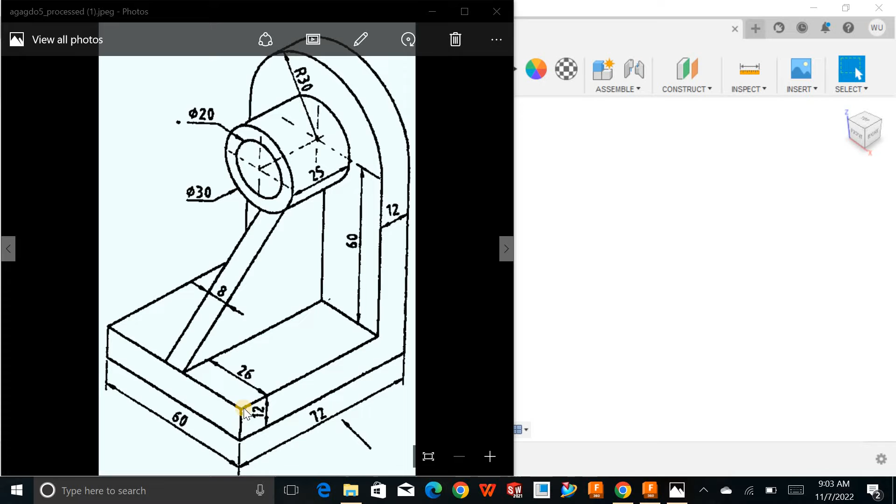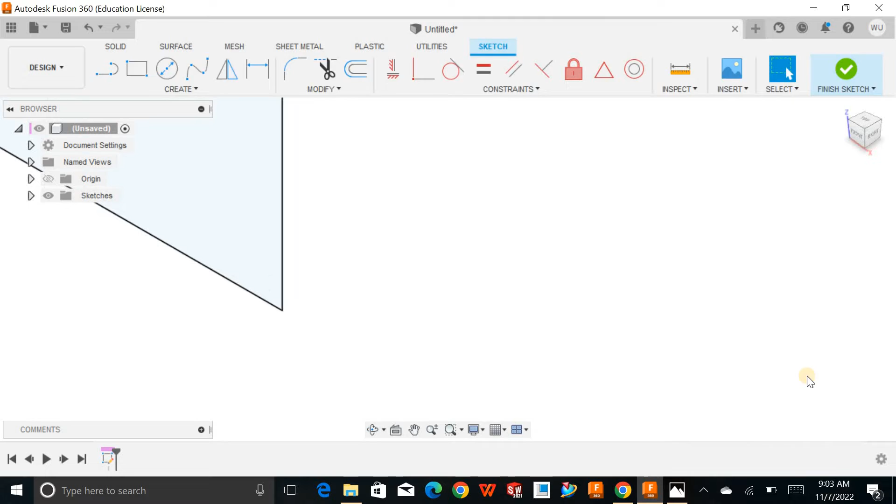So let's start it. First we will make the base. This dimension is 60, this is 72, and the height is 12. Sketch, choose a plane, draw a rectangle. This is 72, press tab, and this is 60. Press enter. Finish the sketch, and this one is 12. Okay, home this.

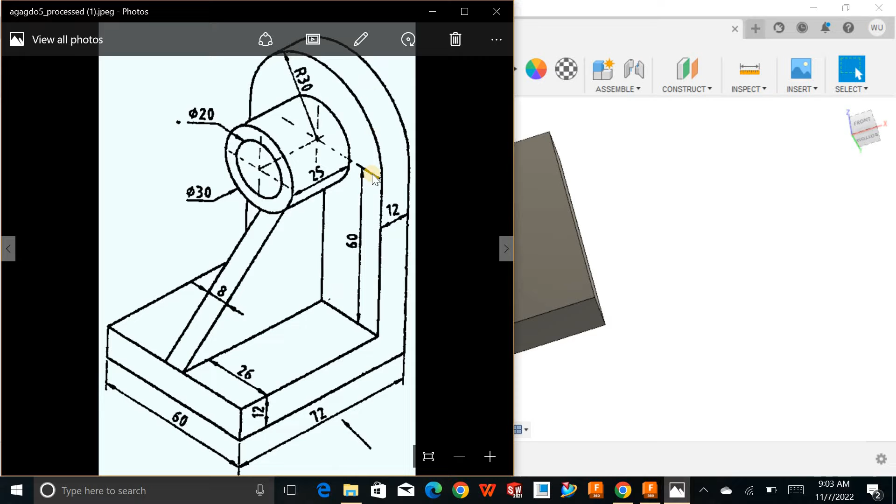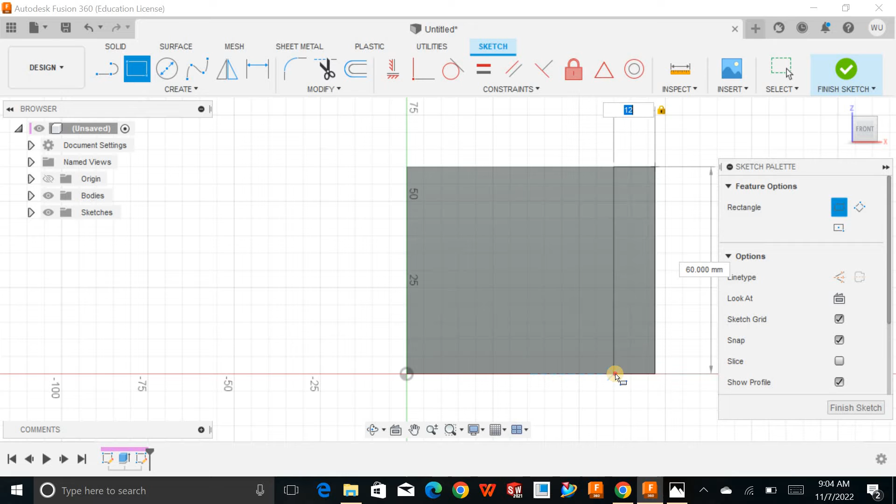Next we will add this vertical flange. For that we have the dimension 60, the thickness is 12, and we will add this radius to extrude it up to top. So height will become 90. Choose this face, sketch on it, draw a corner rectangle. This is 12, and say OK. Finish, extrusion, select this region and say 90.

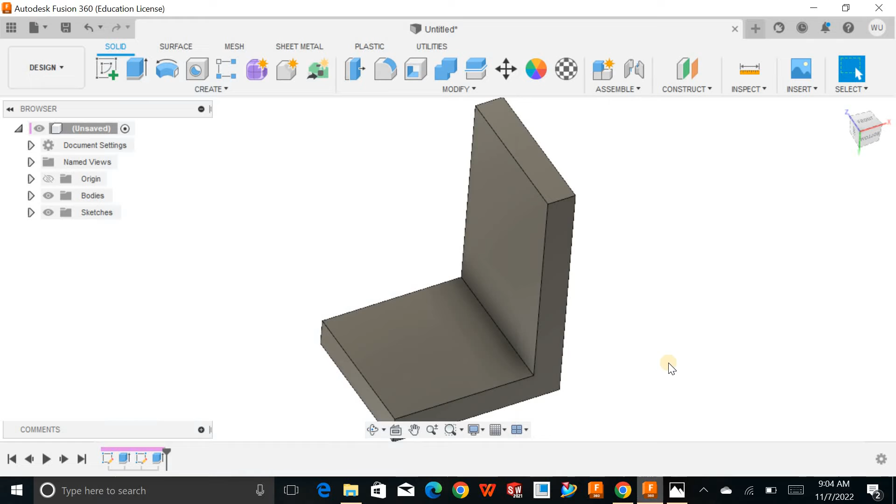Now I will add the rounds of radius 30. Click on fillet, this edge and this edge. Define the radius 30 and press OK.

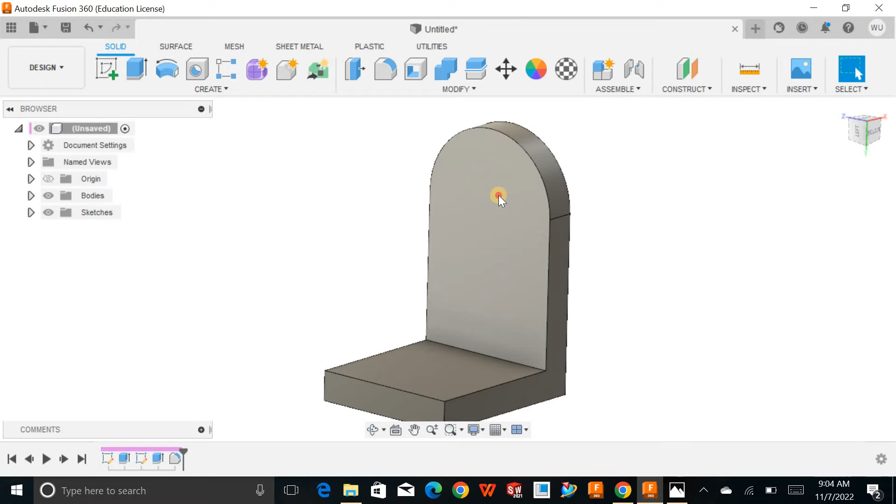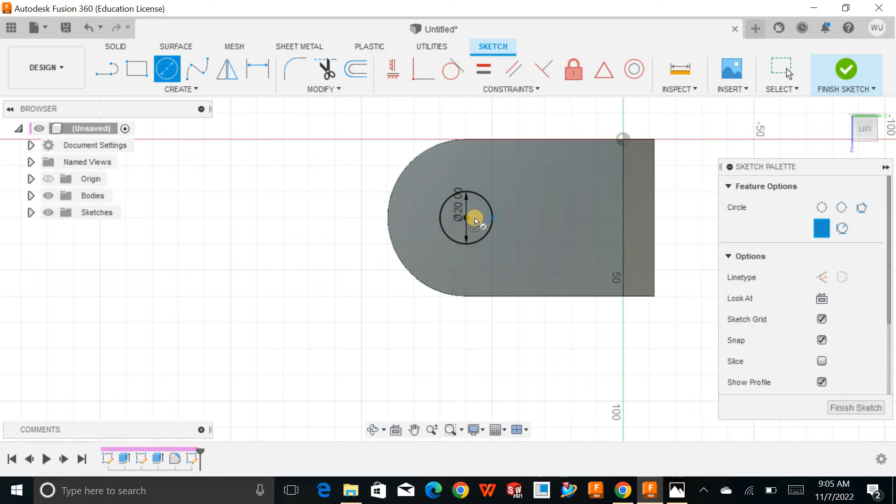Next I will add this extrusion. I will add two circles of diameter 20 and 30. Choose this face, sketch on it, and I will add two circles. Of diameter 20 and another of diameter 30. Enter. Finish the sketch, and I will extrude. Select this region. The extrusion is 25 and say OK.

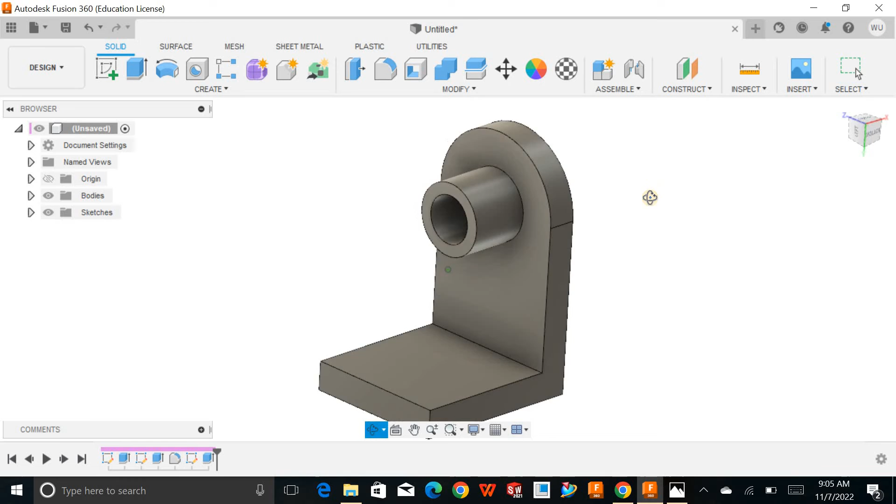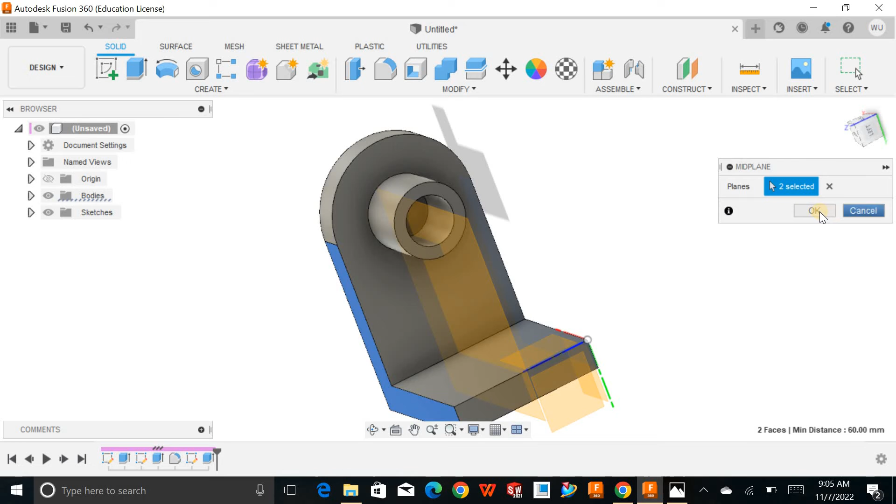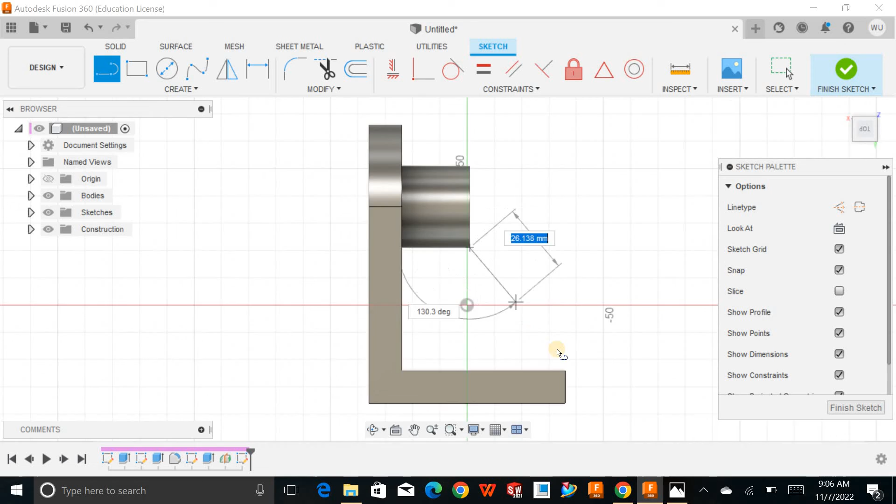Next I will add this rib of thickness 8. For that I will create a mid plane. Construct mid plane. Choose this side and this side. Say OK. Choose this plane, sketch on it, and I will add a rib from this to the base. Draw a line from here till here, and I will finish the sketch. Home this,

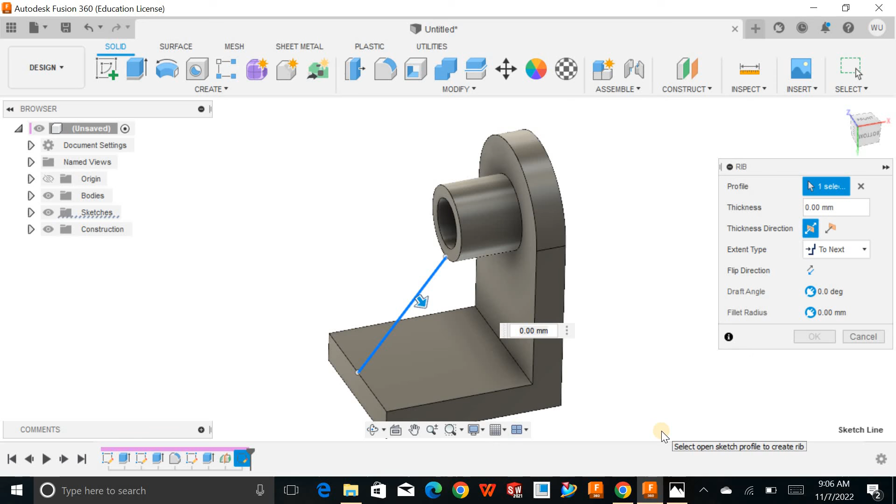click on create, click on rib. The profile is this one and the thickness is 8. Define the thickness 8 and you have done.

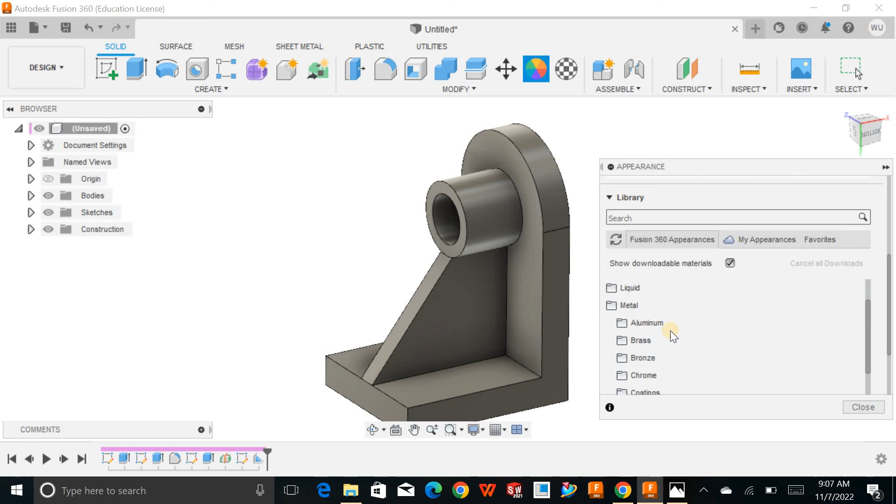Appearance, metal, aluminum, and drop this color. See?